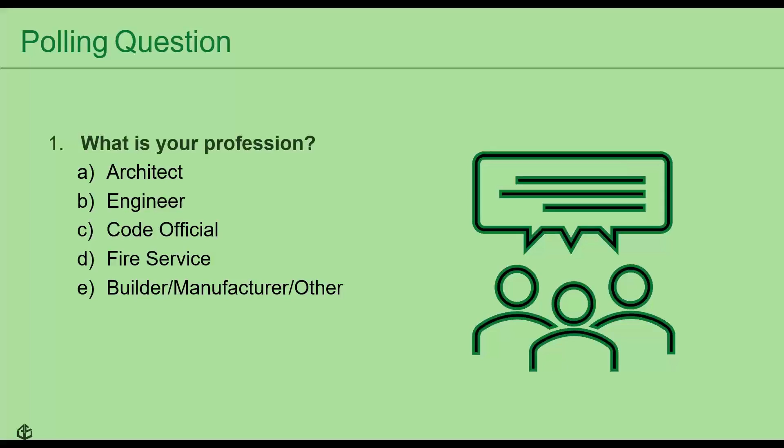Okay, so I'll be kicking it off. I'm going to be focusing primarily on the codes and standards side of shear wall design today. I'm going to start with some references to ASCE 7-16 and where that references shear walls, and then I'll go into some of our standards here at AWC, primarily the Special Design Provisions for Wind and Seismic, but we will dip our toe into the Wood Frame Construction Manual just for a moment as well. Most of you that are engineers or designers are familiar with ASCE 7-16, and the latest version has the seismic loads in chapters 11 through 23.

If you go into Table 12.14-1, that's where it gives you the response modification coefficient for wood structural panel shear walls. And in 14.5.1, it gives you a material-specific reference to the NDS and to SDPWS, the Special Design Provisions for Wind and Seismic, for seismic design and detailing requirements. Wind loads are also in ASCE 7, in chapters 26 through 31.

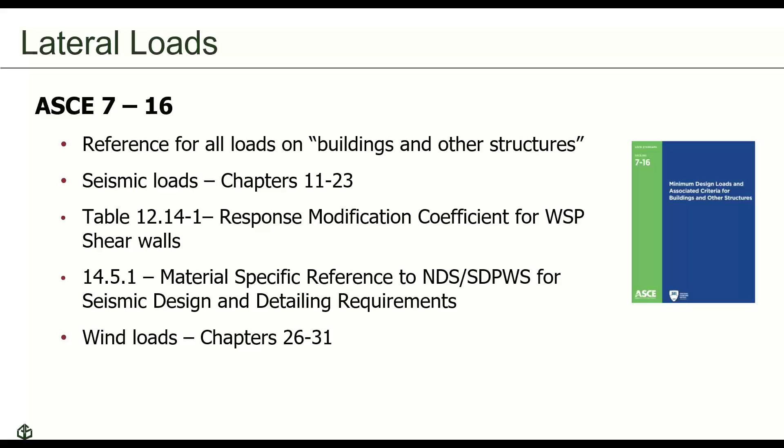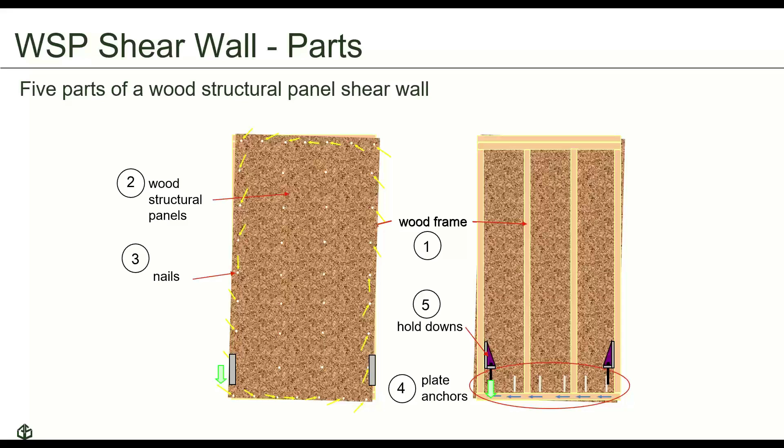There are 5 parts of a wood structural panel shear wall. We have our wood frame, which is typically going to be studs. We've got our wood structural panels, our sheathing. We have nails, which attach the sheathing to the frame. We have plate anchors located at the base of the wall, as well as hold downs at the base of the wall. The plate anchors are going to resist shear, and the hold downs are resisting overturning and uplift.

Going into the Special Design Provisions for Wind and Seismic, we've got 4 chapters in here, and what we're going to talk about today is primarily going to be contained in Chapter 4, which is the lateral force resisting systems. There are 2 types of wood lateral force resisting systems included in this latest version of SDPWS. There's the sheathed wood frame system, which is the traditional wood frame shear wall that I just mentioned that we've all grown to love over the years.

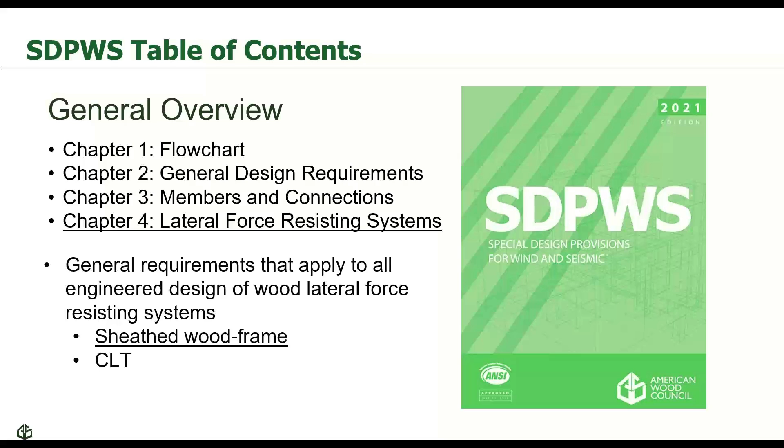And then we have a new system in 2021 that is cross-laminated timber. We're going to focus primarily today on sheathed wood frame shear walls. We're not really going to touch on CLT other than to provide a couple of references to the sections in the standard where CLT shear walls are discussed. But today's focus is going to be primarily on sheathed wood frame shear walls.

Going into Chapter 4, which again is lateral force resisting systems. Chapter 4.1 is general provisions, things that apply to pretty much everything within Chapter 4. 4.2 is diaphragms. 4.3 is where we'll spend a lot of time today, the sheathed wood frame shear walls section. I'll touch on 4.4 a little bit as well.

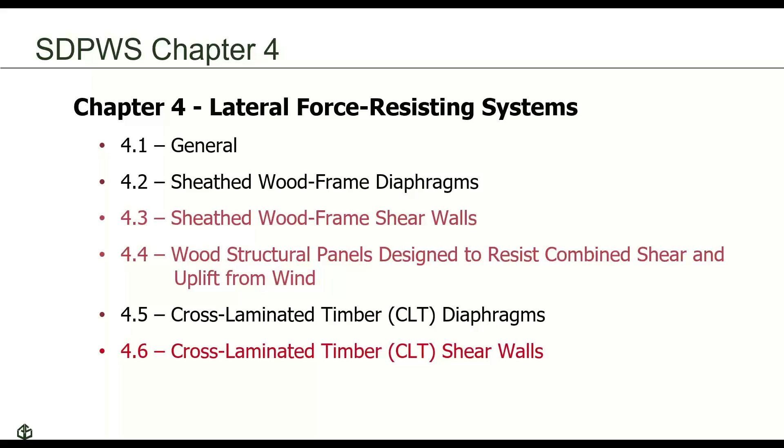This is where we have wood structural panels designed to resist combined shear and uplift from wind. And as I mentioned, there is 4.6 on CLT shear walls, but we won't be talking about that today in any great depth.

SDPWS has 3 types of shear walls defined within the standard. The first is the individual full height wall segments, sometimes called the segmented approach. This approach has full height wall segments that have no openings in them, and they have hold downs on each end of these full height segments. In this illustration on the left, we see the little red circles, which are the locations of our hold downs for our full height segments.

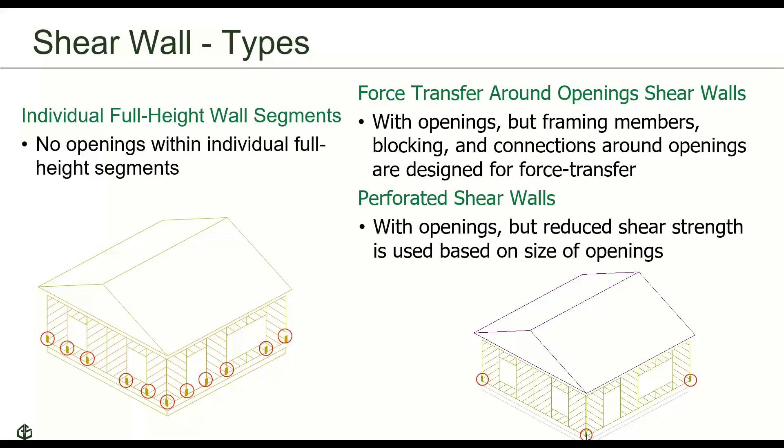The other 2 types of shear walls defined in SDPWS do have openings, but there are some slight differences. Force transfer around opening shear walls, or FTAO, are shear walls that have openings, but the framing members, blocking, and connections around the openings are designed for force transfer. Perforated shear walls also have openings, but they have a reduced shear strength used in the design based on the size of the openings. Both of these types of walls would have hold downs present at the ends of the wall, as you can see in this illustration on the bottom right. We only have a hold down in the red circles here, on the ends of each of these walls.

When we go into SDPWS Chapter 4, we have our tabulated shear wall capacity values, and they need to be adjusted depending on the design methodology we're using. In the 2021 SDPWS, you may have listened to our webinar last month where Phil talked about this single nominal unit shear capacity format in the tables. For seismic designs, for ASD, we would divide the tabulated value by 2.8. For LRFD, we would multiply it by 0.5. For wind designs, we divide the tabulated value by 2.0. And for LRFD wind designs, we multiply the tabulated value by 0.8.

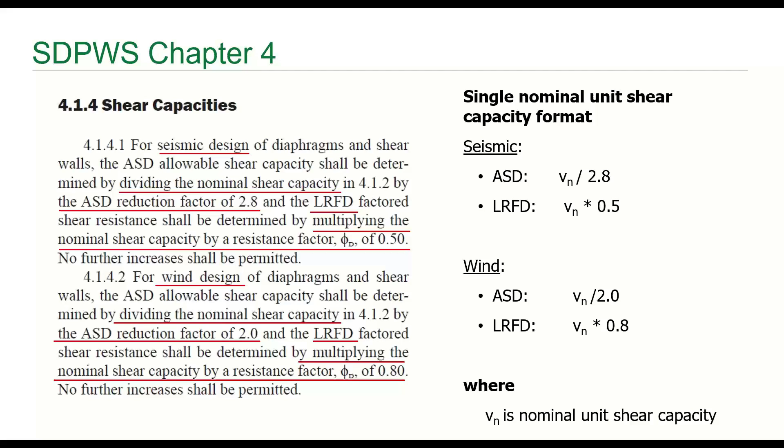So when we go into Table 4.3, also in Chapter 4.3, this is the nominal unit shear capacities for wood frame shear walls, with wood-based panels in Table 4.3a. There are some additional tables for gypsum sheathed walls, as well as lumber sheathed shear walls in Chapter 4.

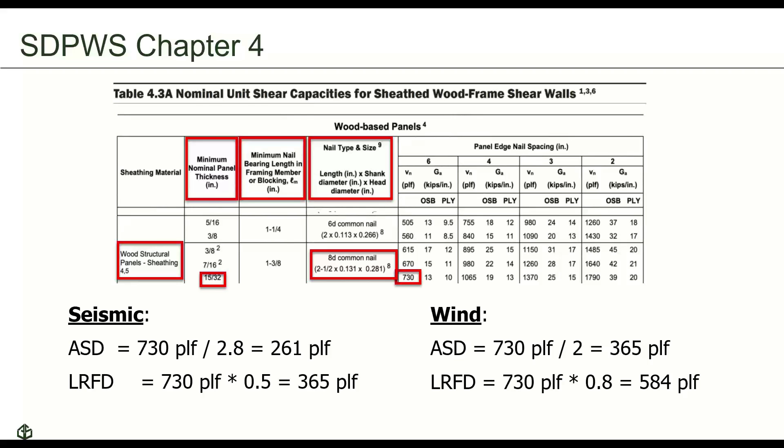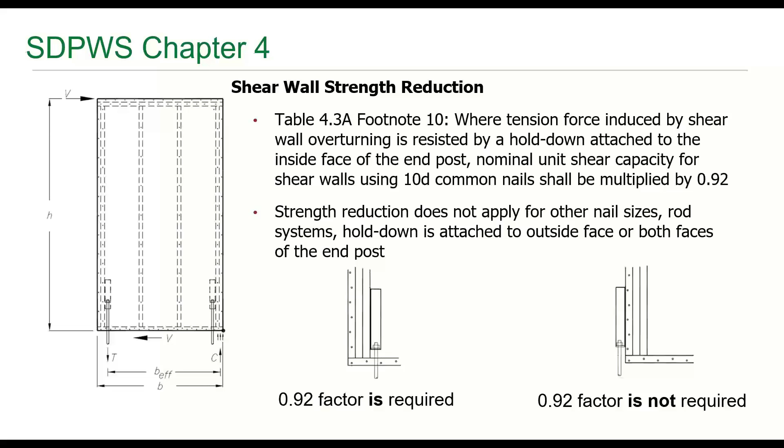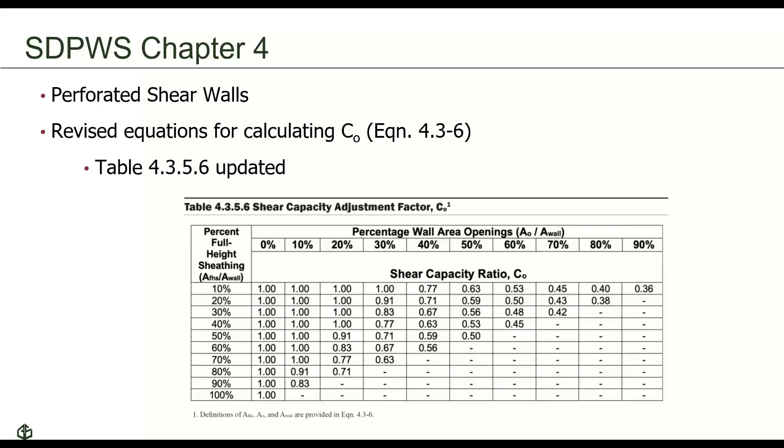Some other items that come up in shear wall design relate to the requirement for 3x framing in section 4.3.7.1, item 5. Where you have nail spacing of 2 inches on center, 10D common nails having penetration of more than 1.5 inches at 3 inches on center or less, or the nominal unit shear capacity on either side of the wall exceeds 980 pounds per lineal foot in seismic design categories D, E, or F, those would trigger this 3x framing requirement. You are permitted to use 2 2x members instead of the 3x member, but they do have to be fastened such that they are designed to transfer the shear between those 2 members. That's stated in SDPWS 4.3.6.1.1.

For those of you that use the wood frame construction manual, you'll be familiar with some of the prescriptive design limitations therein. We do have a shear wall design section in the WFCM in the prescriptive chapter that allows us to design for buildings where our mean roof height is less than 33 feet or 3 stories. We have some shear wall segment aspect ratio elements that we need to take a look at as well.

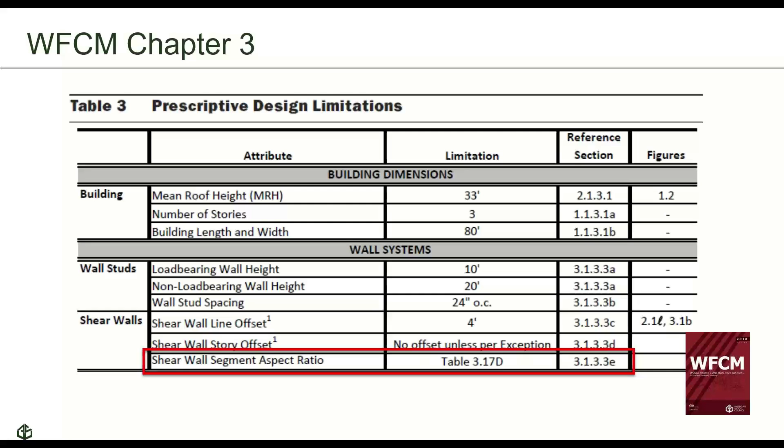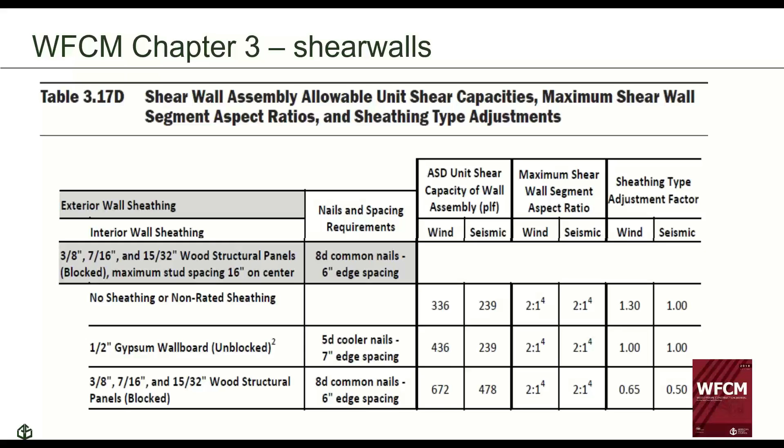In general, the WFCM will limit your maximum shear wall aspect ratio for your segments to 2:1. This has to do with a capacity adjustment that is triggered when we use higher aspect ratio shear walls. The WFCM will allow you to take advantage of those higher aspect ratios, but you do need to adjust the capacity based on the sheathing, or based on the SDPWS exception in 4.3.3.4.1 for wood structural panel shear walls.

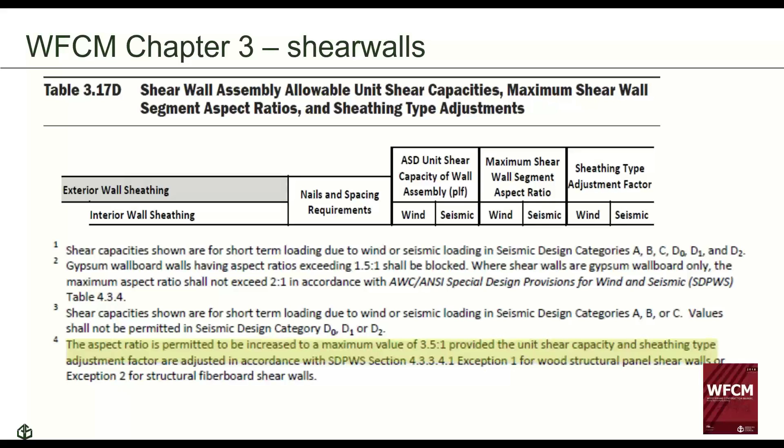So the last thing that I've got, just one slide on today, is CLT shear walls. As I mentioned, these are included in SDPWS section 4.6, where there's a reference to Appendix B for the design provisions. We do have provisions for wind and seismic for CLT shear walls, and there is also some additional criteria provided for areas of low seismic hazard as well.

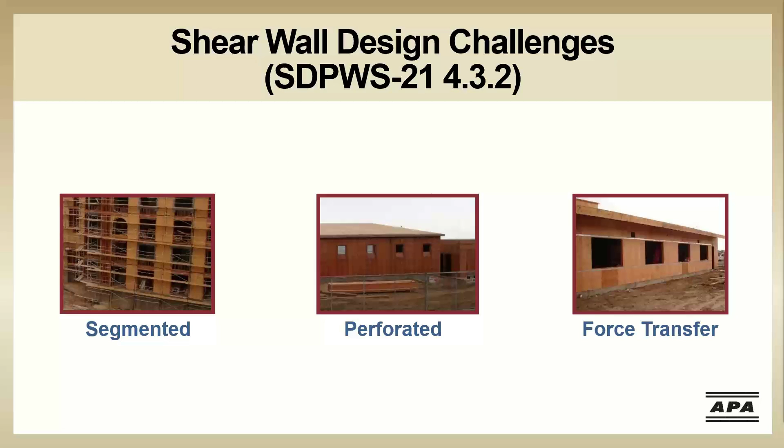So again, segmented shear walls, that's the traditional method we're all probably used to. So I think we're 68% engineers on the line. This method is really only using that full height wall segment, and it's ignoring anything that happens in between those full height wall segments.

The hold downs for these are typically on each end of every wall segment. So you'll see here in this particular example, we've got 4 separate hold downs at the end of each wall segment, and that's to resist that overturning force and uplift. These can get eliminated in some cases if there's sufficient resisting dead load to counteract that overturning force, but that needs to get calculated by an engineer.

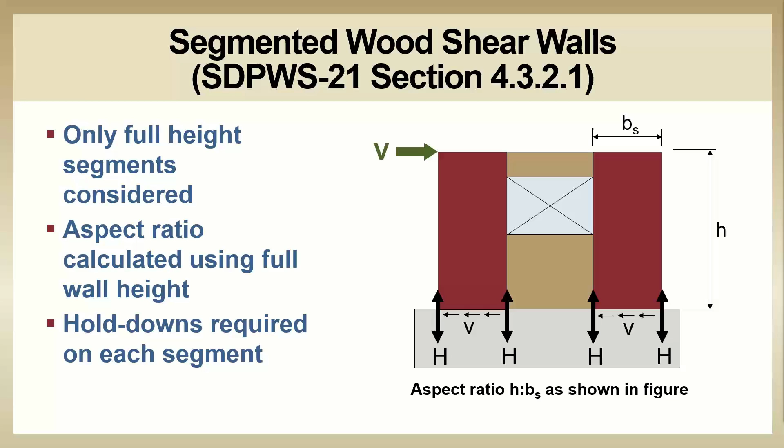Conversely, the perforated shear walls, which you should recall from Lori's earlier slides, are using that empirical adjustment factor, the C sub O factor, to account for the openings in the wall. Unlike the FTAO method, you're not going to see any straps around openings. Since this is an empirical method, it is limited to specifically tested conditions, and some imposed code restrictions make this tend to be less effective in design, because a lot of times you're not meeting all of those extra code restrictions.

Hold down anchors for these, again, are only required at the very ends of the wall. So in this case, instead of 4 hold downs, we've only got 2 hold downs. But the anchors for perforated shear walls are going to be required to resist uplift at all of the full height piers. So that's kind of the trade-off—you're going to have potentially more robust sill anchors, but fewer hold downs.

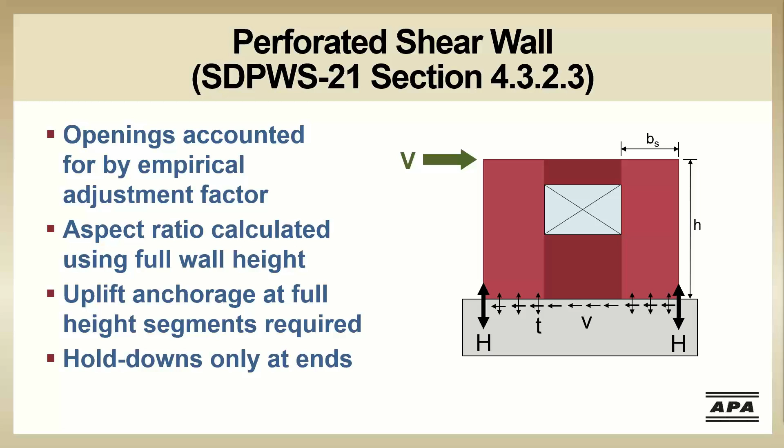The height to width ratio that Lori was talking about earlier is included in regular SDPWS limitations - that's 3.5 to 1 for high aspect shear walls, and 2 to 1 if you're not going to include any adjustment factor. For both the perforated shear wall and the segmented shear wall, that's going to use the full plate to plate height of your wall, and then the width of these full height piers.

Force transfer around openings, or FTAO approach, is mentioned in the code, but SDPWS doesn't give specific direction for the analysis. It only references a rational analysis approach based on principles of mechanics. So in FTAO shear walls, the wood structural panels are going to transfer that shear around the opening.

Anchor bolts are going to be used specifically to resist sliding forces, which is really equal to the applied shear force divided by the total length of the wall. And then the hold downs, which again are only located at each end of the wall, similar to the perforated method, those are going to resist that overturning force.

And then the reinforcement around the openings can be a variety of things. I think the most typical type of reinforcing around the opening we see is strapping - so steel strapping around the openings. We're showing those here in black, but it can also be increased nailing and blocking around that opening to reinforce.

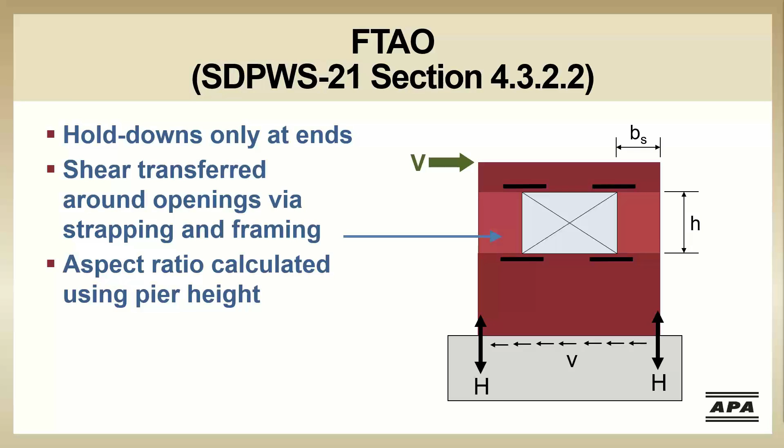So we've mentioned aspect ratio a couple times. Regardless of whether you're designing for wind and seismic, for wind load or for seismic, all shear walls that have an aspect ratio greater than 2 to 1, but less than 3.5 to 1, need to be reduced by an aspect ratio factor. Pre-2015, the reduction factor was 2 times the pier width divided by the height.

Post-2015, it's been switched to this aspect ratio factor shown here - 1.25 minus 0.125 times the height divided by the width. The designer does still have the option of using the previous adjustment factor. If you use that previous adjustment factor, which I think is usually a bit higher of a reduction...

SDPWS section 4.3.5.5.1, exception number 1 says the designer does not have to ensure that the shear distribution to shear walls in a line provides the same deflection in each shear wall. So it is a requirement with the new adjustment factor. It's not a requirement if you use the old reduction factor.

One of the major advantages of FTAO shear walls, or force transfer around opening shear walls, is that height to width aspect ratio is dependent on the height of the opening adjacent to the pier, and not the full plate to plate height of the pier. So this is allowing for reduced pier widths to meet that 2 to 1 or 3.5 to 1 aspect ratio.

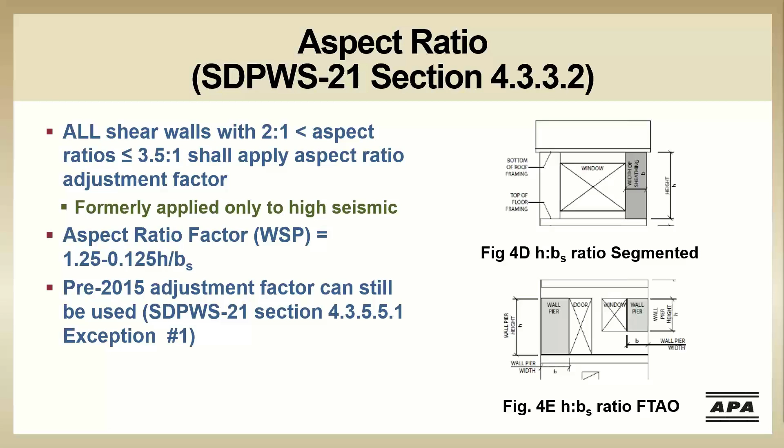So this is a big advantage for designers who are dealing with larger windows. APA did a number of tests on FTAO walls several years ago, and you can download and review that research by searching force transfer or form M410 on APA's publication tab of its website.

But this testing really led to 2 design resources that are also available for free on APA's website. And that's the APA technical note, which has a fully worked out example problem using force transfer around openings design method, and then the APA force transfer around openings calculator.

That calculator is really an Excel-based tool for engineers to use for designing shear walls with multiple openings. And it's based on the Diekmann design methodology. Diekmann was a California engineer who developed this particular force transfer around openings design method.

The calculator is based on US building codes and SDPWS, or Special Design Provisions for Wind and Seismic, which Lori talked about earlier. And this calculator gets updated annually, so it was just updated for this year.

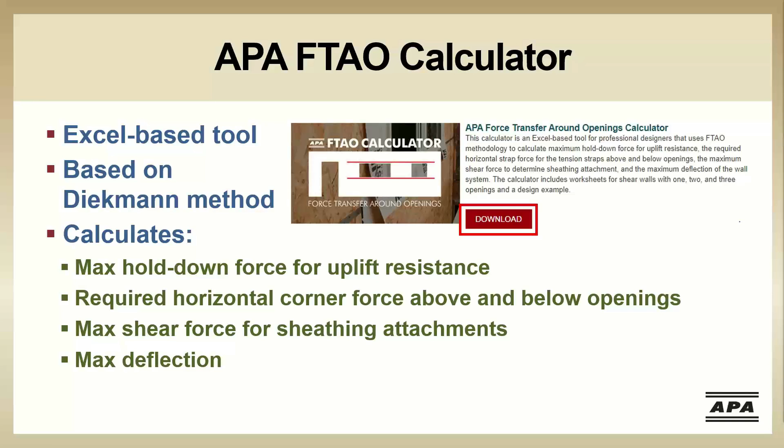I've listed the calculator outputs here, which we're going to see on another slide coming up. But the calculator is set up for walls with up to 3 openings. Now, this calculator was created to design shear walls in a single story, whether that's 1 story in a 1-story building or 1 story in a multi-story building.

And I'm pointing this out because once you start using the calculator, you'll notice pretty quickly that there's nowhere to input your dead loads or other vertical loads that might get transferred from levels above. And the calculator is really only going to look at load flow based on the lateral load applied at the top of the wall in that single story.

So we're not putting in an option for cumulative loads that needs to get done post after you've used the calculator.

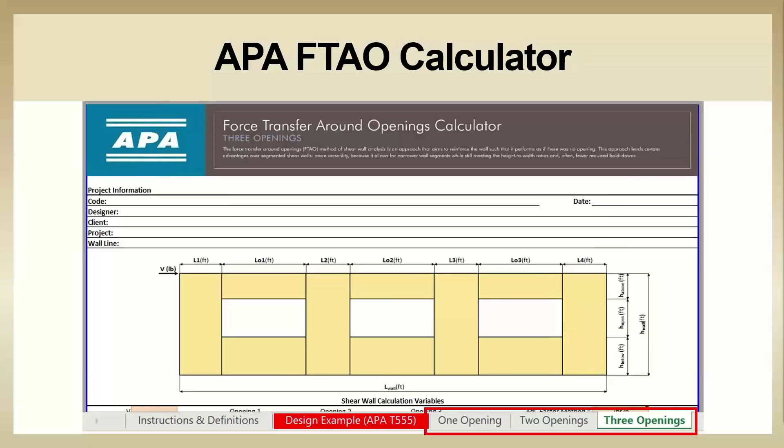And that's going to be either ASD or LRFD. The calculator is not going to apply any factors to whatever load you entered, so keep that in mind when you're using this tool.

One limitation of the calculator is that it assumes all of the openings have the same height. So if your shear wall has multiple openings of varying heights, you need to use the worst case scenario when inputting your opening dimensions.

Regarding pier length or width, SDPWS 4.3.5.2 number 1 limits a pier length to a minimum of 24 inches. This tool will not limit you to 24 inches. This is based on APA study and laboratory testing of FTAO shear walls, and so the calculator will allow pier lengths a minimum of 18 inches long as long as the aspect ratio of the pier is 3.5 to 1 or less, and all the edges of the panel are blocked. An error message will appear if the pier length is less than 18 inches.

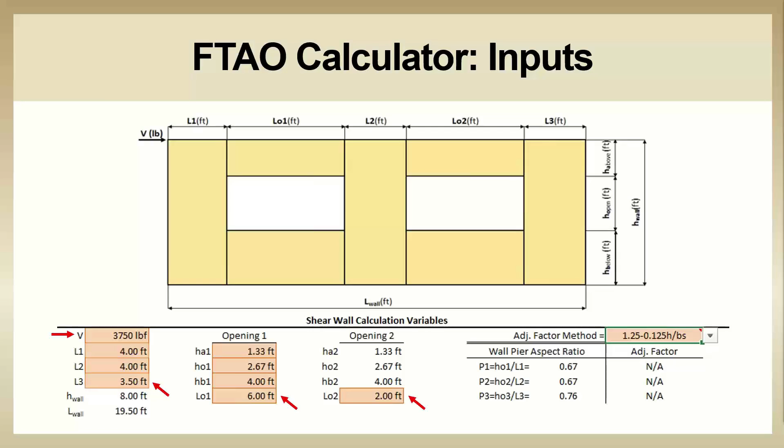The FTAO calculator will also determine the shear wall deflection using both the 4-term equation from the IBC and the 3-term equation from SDPWS, that's Special Design Provisions for Wind and Seismic.

The user enters project-specific parameters, including the unfactored lateral load at the top of the wall. This is sometimes also called V-induced instead of V-unfactored. We put V-unfactored in here just for clarity, we were getting a lot of questions about it. So this value should be the applied lateral force entered in the inputs section above, but without any load type or design method factors applied to it.

The sheathing material, wood end post information and fastener information, as well as the hold down information that gets entered here, is completely separate from above. So please note the calculator is not going to internally verify that you've correctly designed your wall, and that these inputs here adequately meet the requirements in the design summary section above.

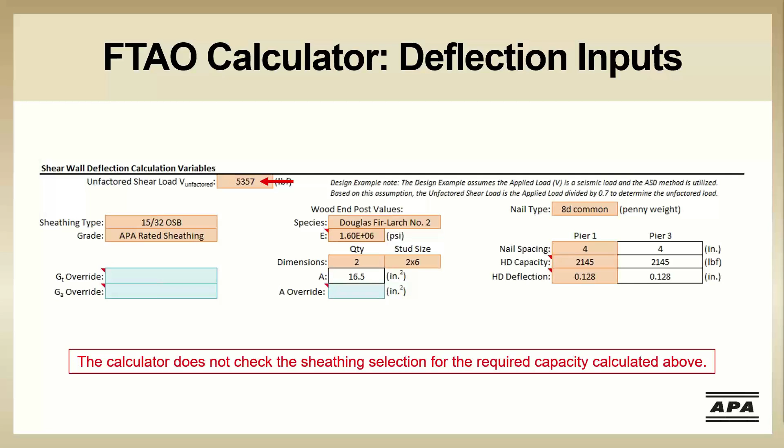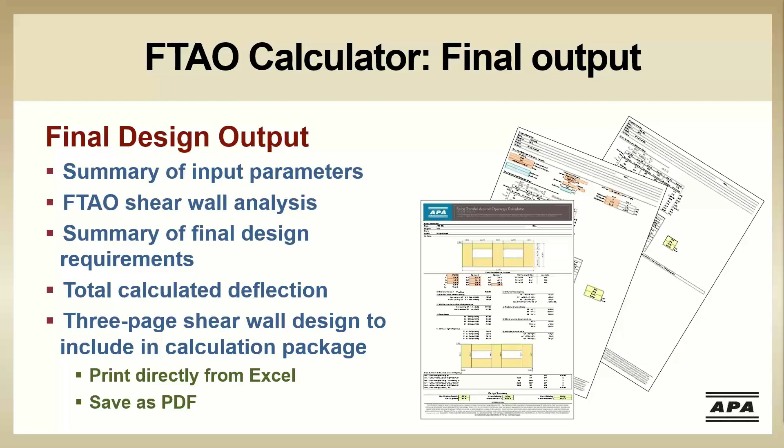This tool was originally developed with seismic loads in mind, but APA has transitioned it over the last few years to make it more applicable in wind-governed areas. Most of the country is wind-governed, and you're dealing with much higher uplift loads, especially if you've got some large overhangs on your building.

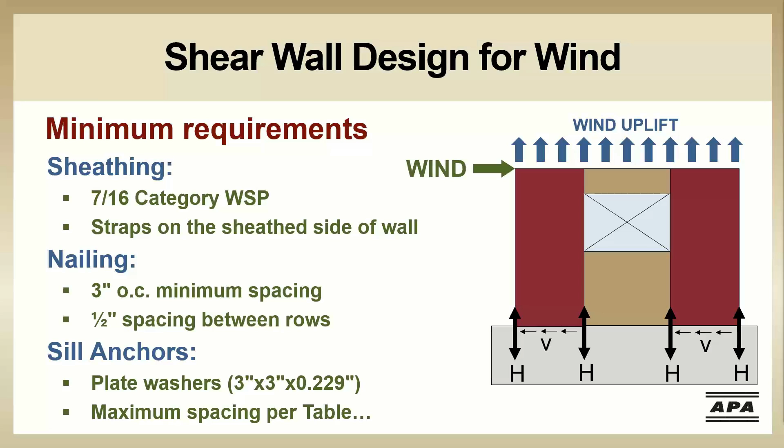So the last requirement on the previous slide was talking about that sill anchor spacing, and this is a really important part to get that uplift load and shear load into your foundation. And for this reason, there's a maximum anchor spacing. You can find this either in APA System Report 101, if you want to search that for free download on APA's website, or in Table 4.4.1.6 in SDPWS.

This systems report is going to outline the basic design steps for making sure your wall can resist both horizontal shear and vertical uplift for wind at the same time. It also has several graphics explaining the minimum detailing, as well as an example.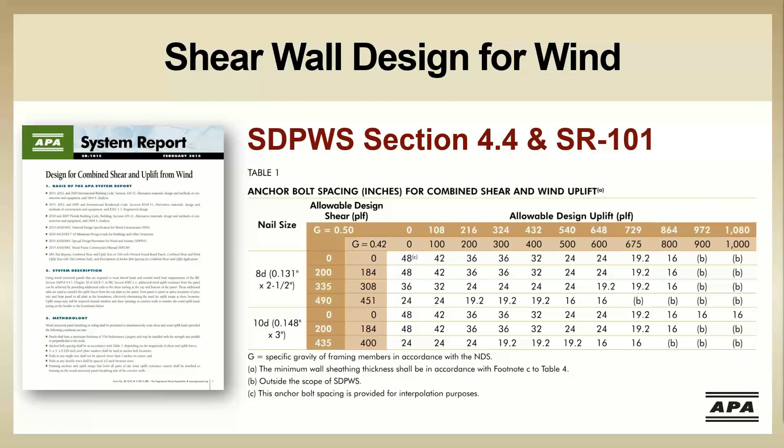So I think today we've pretty much covered all of these things, what your shear wall and your shear wall sheathing is really doing for your building, and that's preventing that wall racking, adding stiffness to the building, transferring the lateral loads around openings where you're using the perforated method or the FTAO shear wall design method, and resisting lateral and uplift loads at the same time, potentially, if you're detailing it correctly. I think now we're going to open it up for discussion.

Yeah, thank you, Alita, that was great. So actually we've had several questions. I think that we can start with you.

First question was related to force transfer around openings. Can you design an FTAO shear wall with a door, or does it need to be sheathed on both sides of the opening?

And I think, did your calculator have the capacity for that, or did you want to talk about that? Yeah, we can absolutely talk about that.

As I mentioned earlier, FTAO needs to be done using rational analysis. There are different methods of rational analysis. The calculator is really based on APA's FTAO testing, which showed that the Diekmann or Thompson method really provided the best results compared to the test data.

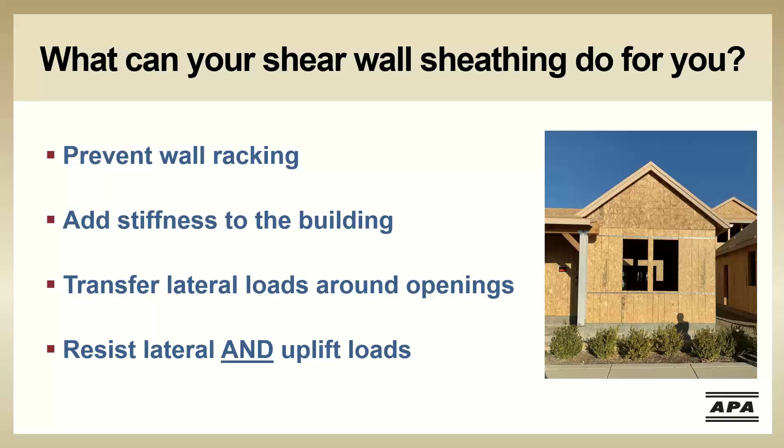In table 4.3a and the other shear wall capacity tables in SPIDWIZ, we see the nail type and size prescribed both by length, shank diameter, and head diameter, and a minimum nail bearing length is prescribed as well. That's the penetration into the framing member or blocking required for a given nail.

So there were questions on, can we use shorter nails that would meet that penetration and have the same diameter. In general, the tables are prescriptive, so you are not going to be permitted to change anything beyond what is prescribed.

If you are trying to use different nails than what is presented in the table, SDPWS does give you an alternative option. It's ASTM D7989, a standard that allows you to determine the seismic equivalency to the system. You would need a report from the manufacturer or third party showing these fasteners have been tested in accordance with that seismic equivalency standard.

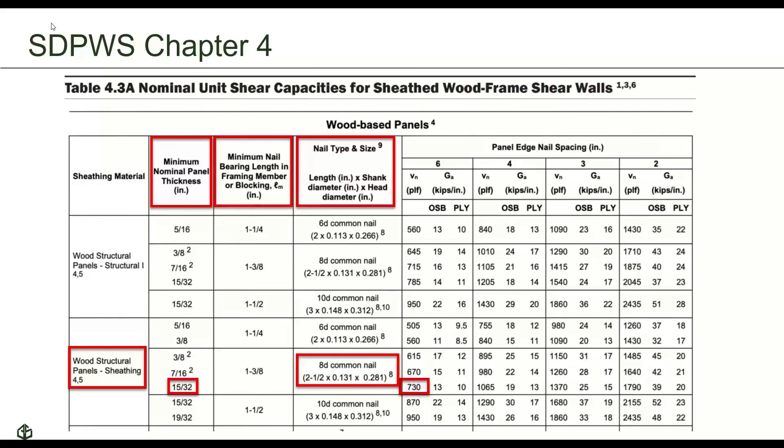Here's a question on the 3x requirement for common framing members, whether or not that 700 PLF value was factored or not. That's a nominal unit shear capacity—the value in the SDPWS tables, table 4.3a or 4.3b, whichever. So that's the nominal value that you would then adjust, not factor, based on whether you're using ASD or LRFD.

All right, here's a good question. Are there height limits in SDPWS for shear walls? We do not have height limits in SDPWS. We do have aspect ratio limits, as I briefly alluded to and Alita talked about as well. There are height limits present in ASCE 7-16 for wood frame shear wall systems, wood frame bearing wall systems, and building frame systems. If you look in ASCE 7-16 table 12.2-1, that's where they have different height limits for seismic systems. In seismic design categories D, E, and F, there are height limits of 65 feet prescribed for wood frame shear wall systems. In lower seismic design categories, there's not a height limit based on that—it typically comes from the building type or other elements. But short answer is no, SDPWS does not have specific height requirements.